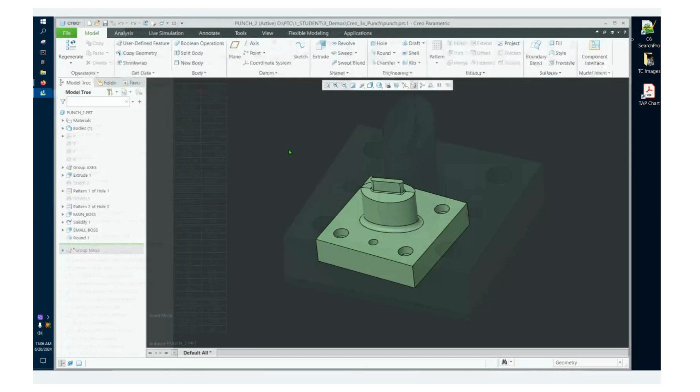Creo NC is obviously stood up on the backside of Creo Parametric, if you will. This is a standard Creo Parametric. It's just a punch widget that we have here today that we're going to take a look at. This punch widget exists on what we call... whoops, I've got an instance open.

My apologies, I'll have to open the generic here. So we'll open that up. This object exists on what we call a family table.

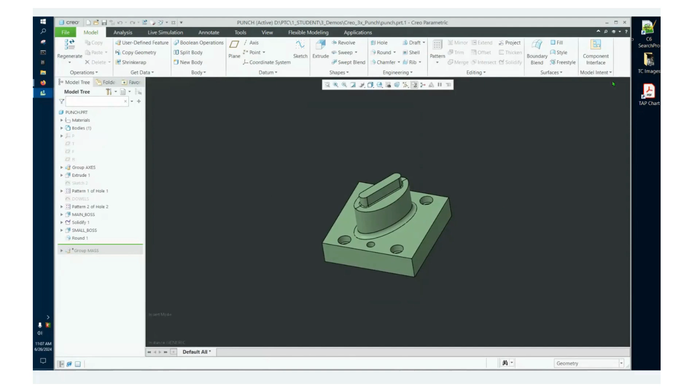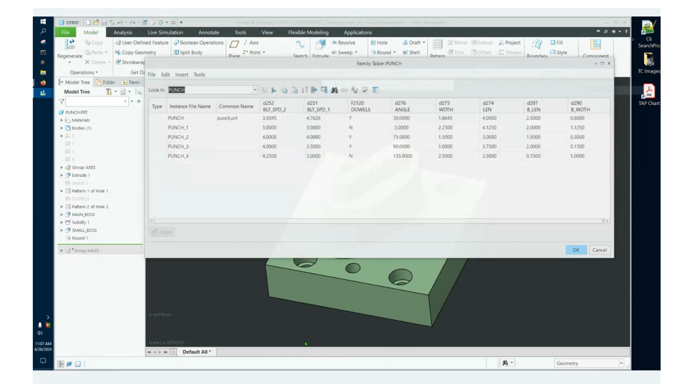As we see here, we have a tabular setup used on the design side to create 4 different iterations of this widget, with slightly different dimensional and geometry configurations based on the values of that table. The reason this is significant is because we can do the programming in Creo essentially one time.

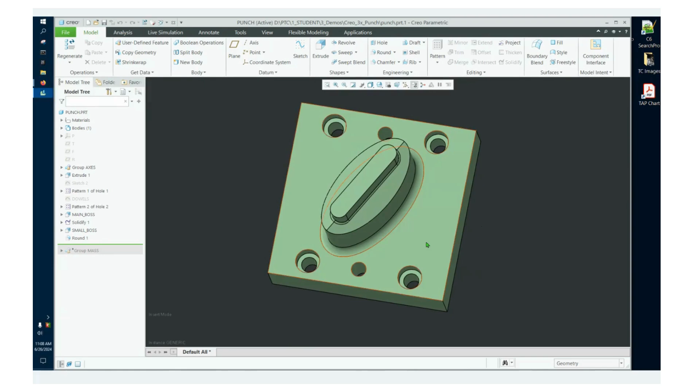That's just one of the many benefits that Creo NC enjoys, being connected as intimately as it is to the Creo Parametric product. We'll be jumping back and forth between this part a little bit because we're going to watch changes on this part deploy into the Creo NC environment. But this is our Creo Parametric object that we're going to work with today. It's just been created as a demo for this purpose.

It contains a handful of different Creo Parametric features that are manipulated by the tabular information in the family table. So we'll kind of keep this in the background a little bit. I'm going to close that particular instance of the object that I had opened, and we're going to go back to our Creo NC file here.

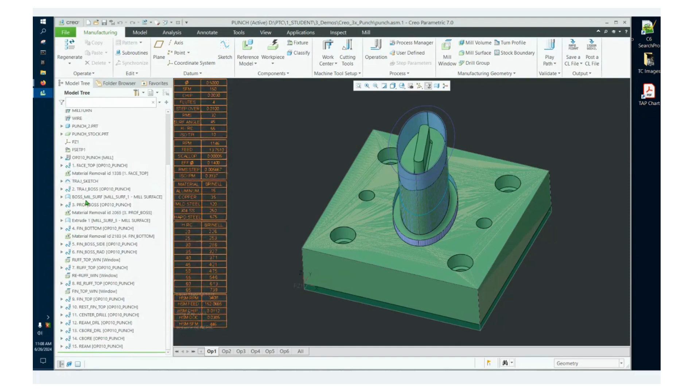As I mentioned, I'll show this real quickly as a first part of what we look at today, and then we'll get more intimate about Creo NC itself. We have 4 versions of that part on the table, and that allows us to switch these things out quickly and easily and keep all of this programming that you see here. So we have a bunch of these cuts already established on this object.

You can see here we have some mill surfaces shown on our part, and these were used to create different cuts and things to that effect on the part. Those surfaces can be hidden and shown, much like you would work with any other NC or design product.

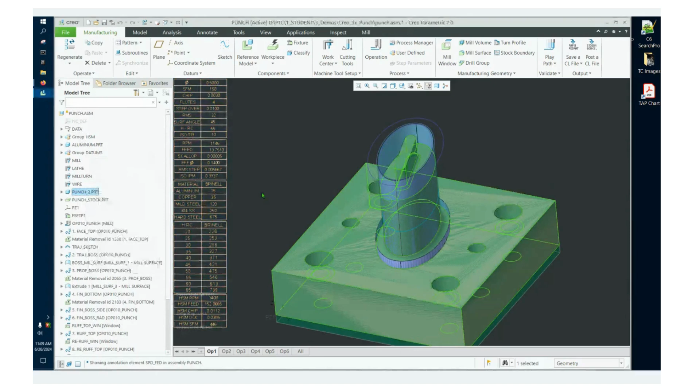In this case, what we're looking to show is that I've got this punch 2 version of this object up here right now. And if we come down and look at the center drill path, I'm going to turn that on and play this and set it up. We see here's where the center drill is drilling on these parts, drilling those hole locations that we see there.

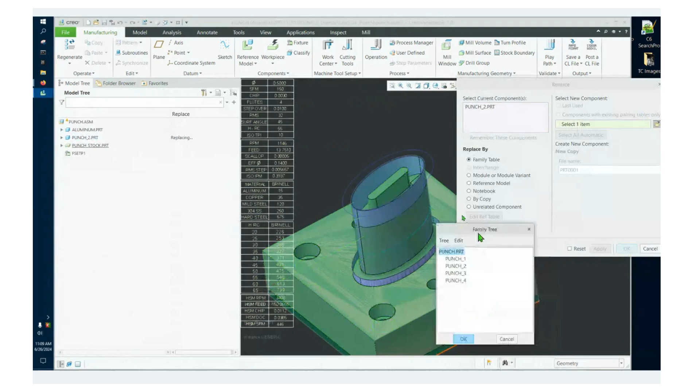If we were to swap this object out for one of those others on the table, I'm just going to select one of those other table objects. We'll select the generic in this case, which wouldn't typically be a workflow, but we'll do it anyway. Now we see we've swapped that back over to the other iteration of this part, and we've moved these holes and dimensions somewhat by doing that.

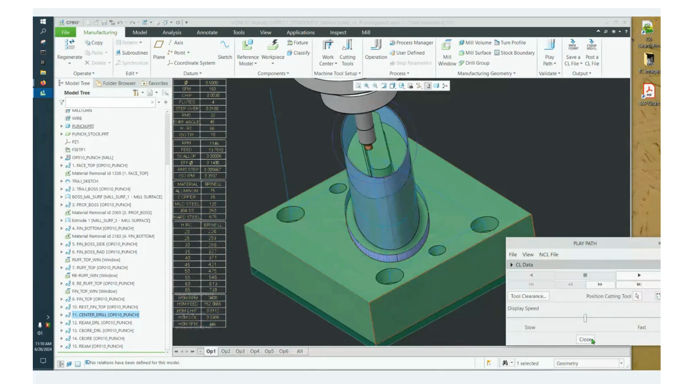But all of the machining is still connected to that. So when I come in here and play the center drill, it's still very much connected to those parts and to that geometry that we worked with there.

If we jump back to our punch part, which is what we now have in the NC side, I'm going to open up our punch 1 iteration here, and we see that doesn't have the dowel pins in it. So let's go find another one that does have the dowel pins, so it's a little easier to see what happens here. Okay, there we go, this one does have the dowel pins in it.

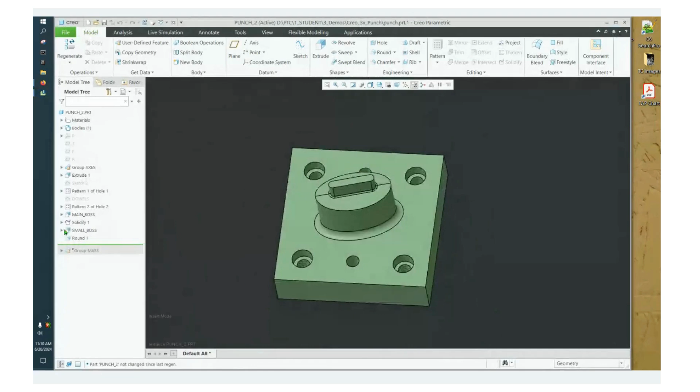So let's go ahead and manipulate the dowel pin position in this file. This might represent a typical scenario of an engineering change that somebody is making with Creo Parametric, and we're subsequently moving these dowel pin holes around, kind of reattaching them. That might represent an engineering change that somebody does inside of a Creo Parametric model.

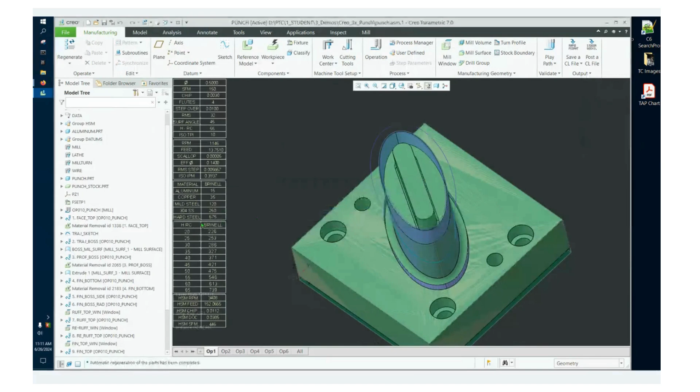Now, because we have this linked in, and we have this awesome associativity between Creo Parametric modeling and Creo NC, when I jump back into the Creo NC part, our punch assembly, and bring up that part, and we regenerate that, now we see that my center drill subsequently follows that new geometry automatically.

So this is the essence of one of the biggest benefits of doing everything in the same house, as I like to say.

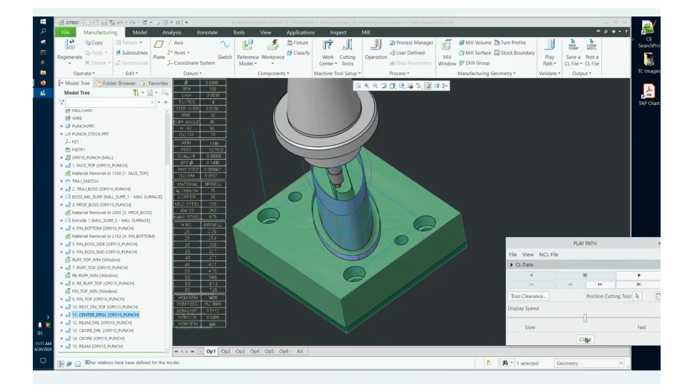We do the design in Creo, we do the NC in Creo, everything is linked in, everything is associative. We can subsequently make changes to the object in design, propagate those changes into NC, and not be reprogramming and starting over and going through extensive rounds of double checking to make sure that what we expected was in fact what happened.

So the power of being able to do that can't really be overstated. It's a very significant part of the benefits you get from working in a connected universe like that. So that's what this is all stood up on. That's probably the most important and most significant thing that people enjoy in their design and NC linked connections, when we're using a PTC product to address both of those issues, both design and manufacturing.

Now we understand that it's all connected and it's all associative, and I can work on families of parts. I can just come in here and right click on this and swap this out for another one of those, and I don't have to redo all the programming like we saw.

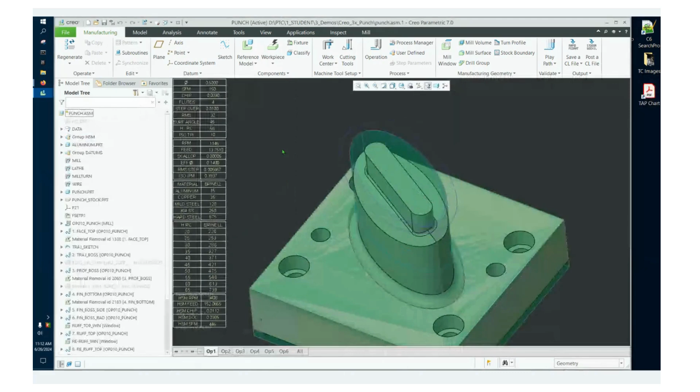Very, very powerful stuff. But let's have a look at some of the things that Creo NC in and of itself does. So here inside of Creo NC, it's a tree, and you build out your cuts like you kind of would in most any modern NC product. We'll talk about a few of the significant things that Creo NC does.

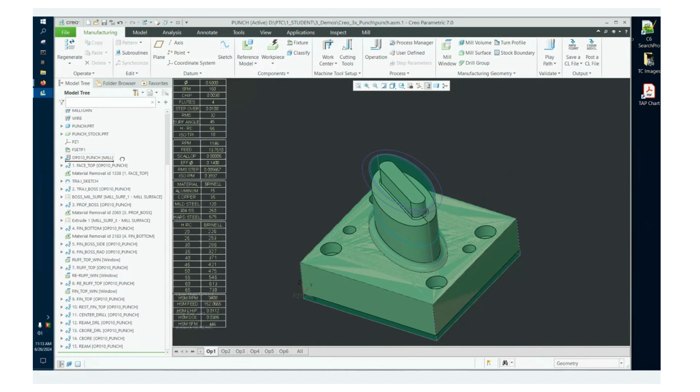So if I come in here, here we have our part, and I've just rolled back in time, which is one of the nice features that Creo NC and the design side provide, the ability to roll back in time and sequentially step through the iterations of what you've done and how you've built what you built. So here in this case, we've got a face mill, and I'll just activate that, play that, put that on the screen. And of course you can play these things through.

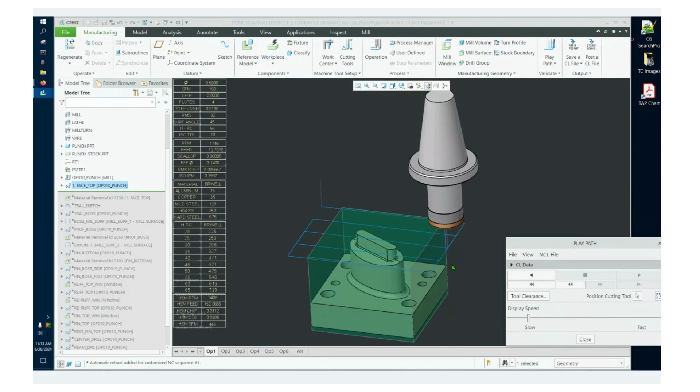And then we have a simulation product that's tied into this called ModuleWorks. That actually allows us to, in a real-time sense, watch the material being removed, in a more advanced playback, I should say.

And we also have here inside of Creo NC the ability to work with this green part that you see, which in this case represents what is referred to as my workpiece. Now, when we make cuts to the workpiece, one of the benefits here is that it will progressively be understood by Creo NC as we move along, as what we would generically refer to as a stock modeling context.

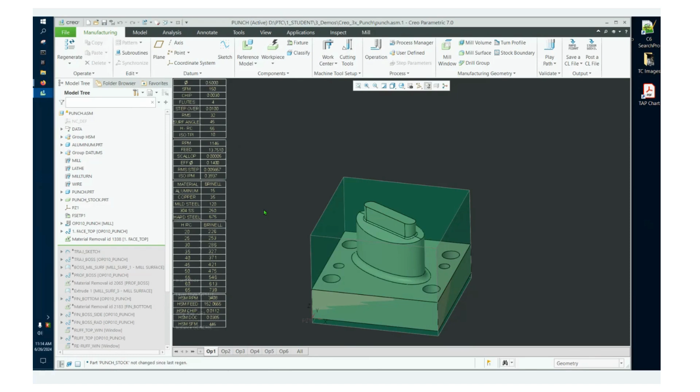So in this case, I did a material removal, and that material removal is taking off from my workpiece everything that this face mill cut off. So now my workpiece is the same height as the top of my part, because that's been trimmed off. So now we'll step down through these cuts here. So we have some different cuts we can look at.

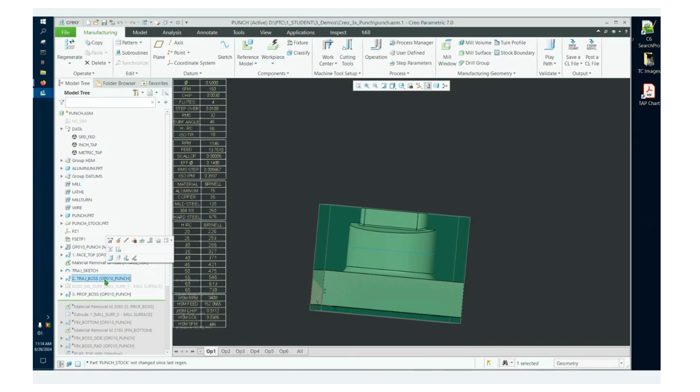So here's a sketch that I've made to create what we refer to as a trajectory, which is a big fancy word to refer to path. So we're saying, hey, this is the path, I'm going to have this oval shaped path that goes around the part here. And then this is the cut that is associated with that path.

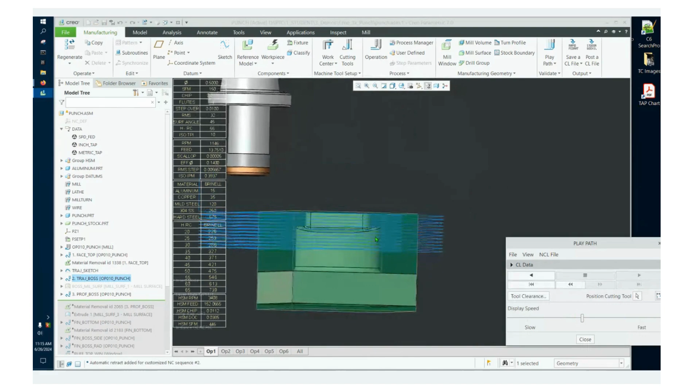And this is one of the ways we can do that. So we're going to come in and rough this material off in kind of a biting in, profiling sense, and rough down the punch to that level, using that as our path. That's one way we can do this.

We can simply sketch these curves, or select a curve on the edge of a model, for instance the curve I'm highlighting now, and we could use that as a path to drive a tool. We can sketch those paths, we can pick those paths off the model. We have a lot of flexibility for that. These types of trajectory path-based cuts are available in 2 through 5 axis.

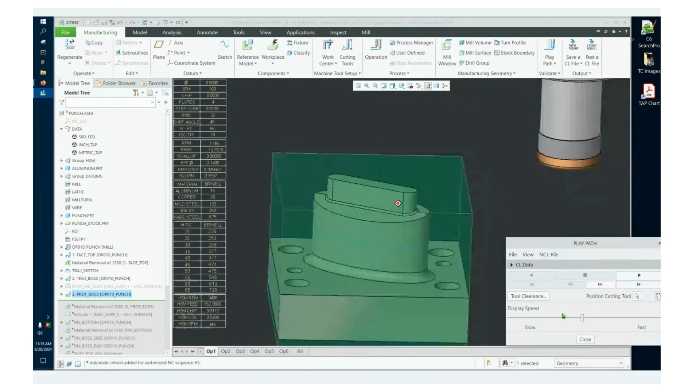Okay, so everybody in all things NC pretty much does some form of profiling too. So here we have the equivalent type of cut as a profiling operation, and we'll watch this go through now, and we kind of see the same type of stuff happening here, but it's based on a profiling operation instead of a trajectory-based operation, to take that same material off. Now, what's driving that profile cut is this surface.

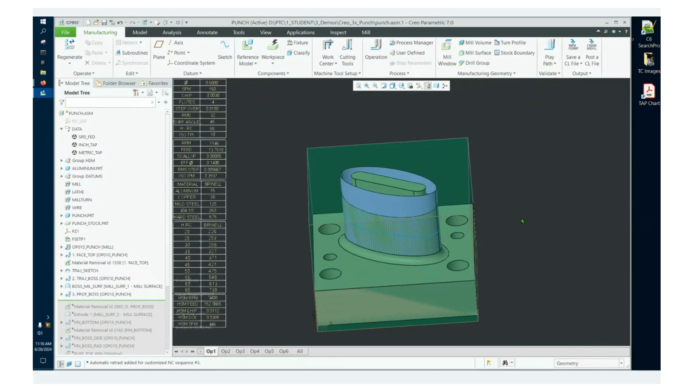And this is a unique, very powerful feature of Creo NC: the ability to simply create this surface, copying a piece of the design model underneath. You can see from the zebra striping that these things are in fact dimensionally coincident.

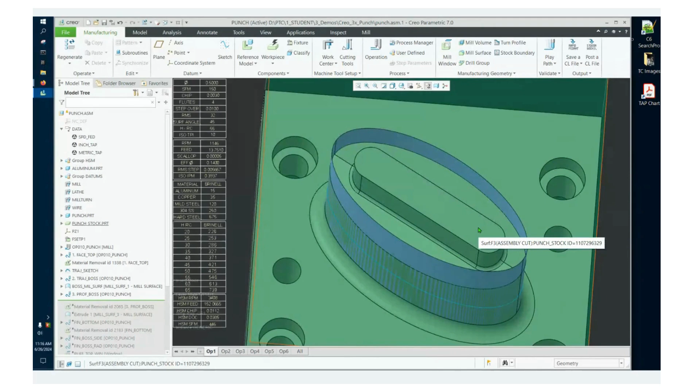And the ability to copy this surface and then subsequently pull this surface up to my workpiece, so that the cut doesn't think or understand anything having to do with this secondary boss that exists on my part. That's not what I'm trying to do right now. I just want to rough the primary shape from the bottom up.

I am in this stage of operation not really looking to get into the intimacy of cutting into these fancy details on the top, but I want that boss to be complete from the top down or the bottom up, however you want to look at that.

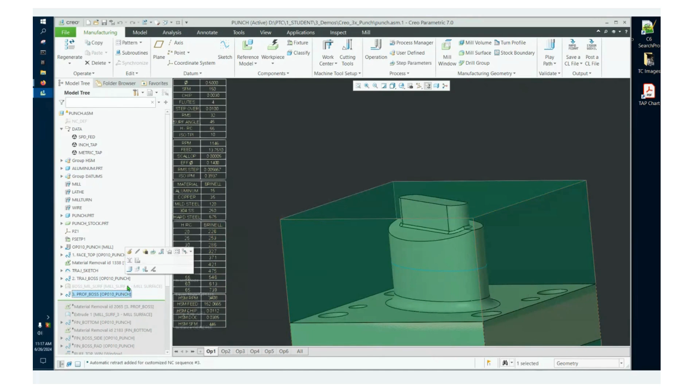In order to drive that when my geometry isn't that, because as we see looking at the geometry here, it doesn't have that shape. If I told it to just profile these surfaces of the punch that we see here, it would create a cut that starts up here and would be kind of a little disconnected, and then it would eventually catch up to the full circumference where it's continuous, and then it would proceed with the cut.

But the ability to create this surface quickly and easily and copy it and just pull it on up to our workpiece allows me to pull in this profile cut that we saw and drive it from that surface, so that I don't have to get into a cutter path that gets involved in the top of the part up here in a way that I'm not looking to in this stage of the cutting operation.

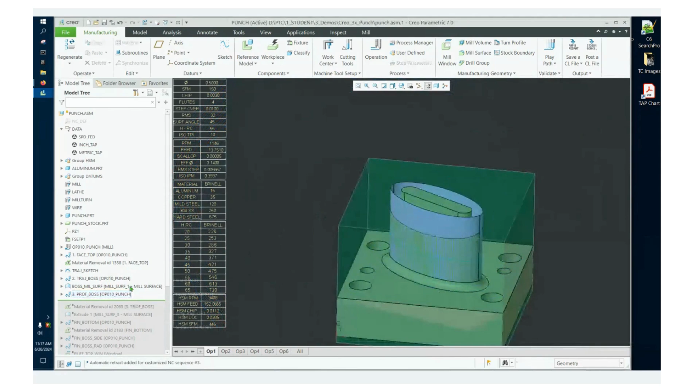So it's very powerful to have the features of being able to create on-the-fly geometry that's not linked into the actual model. So we have this surface here on the model and it is associative to the model, but if I were to actually go open this object, that surface isn't there. That surface doesn't negatively impact the design group.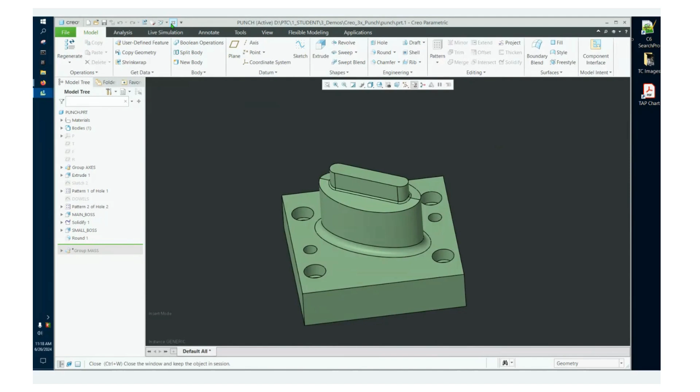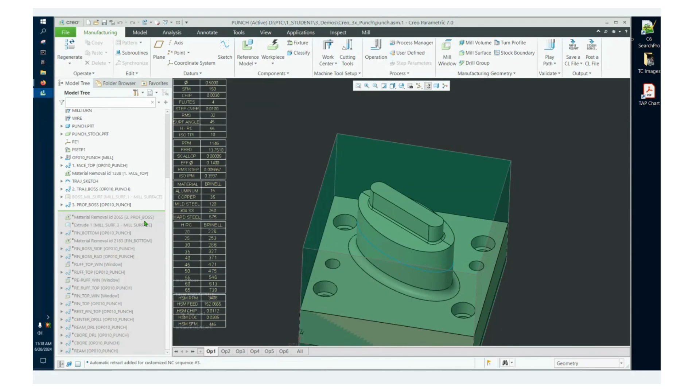It's not something they have to hide on a drawing or something they have to interact with in any way, shape, or form. The surface simply doesn't exist for the design group. It only exists here in my space inside of Creo NC. And this provides a lot of strength for me to manipulate an object by adding some surfacing to it to influence the cutting of that object in the desired way, shall we say.

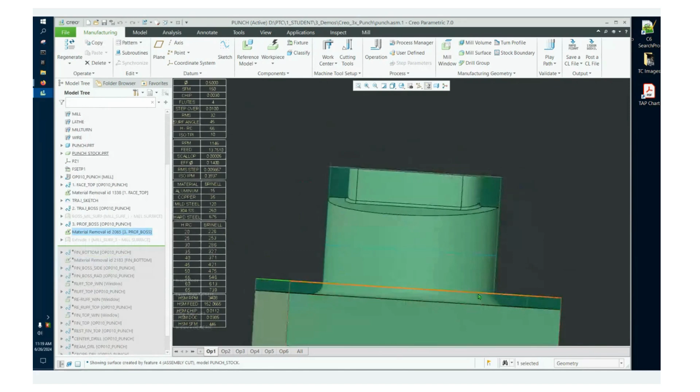So after that's been completed, we could go do a material removal cut again. And when I pull this material removal cut into the timeline, as I just did, we can see now that, yep, now it's clipped the model again. The face mill clipped it off on the top on this surface, and the material removal that we just did referenced this profile cut and subsequently clipped it off down to where the radius intersects tangent on the shape of our punch.

Now we have another surface that I'm going to hide. So we look down here and yeah, this is the kind of stuff that becomes a little bit problematic, right? So we have this big chunk of material here in our part that we still need to knock off. And we've got a tangent radius that's coming up off of the bottom of it.

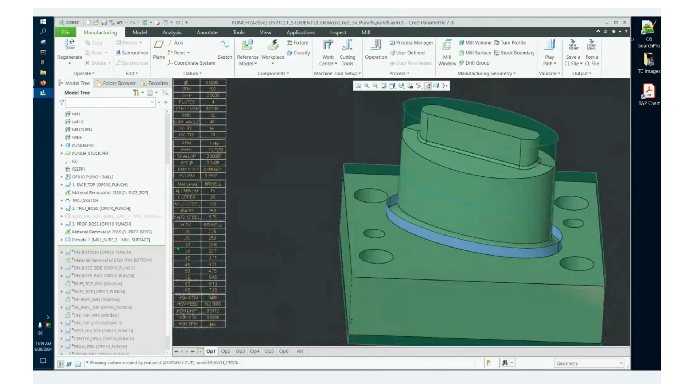So it's nice and powerful here inside of Creo NC to be able to create a surface just using that edge, that tangent edge of that radius where that exists, and then subsequently drive another cut up against that surface. So now we're using a great big face mill type of tool here, and we're going to go in and cut everything off, take one big pass, everything off right up to that surface.

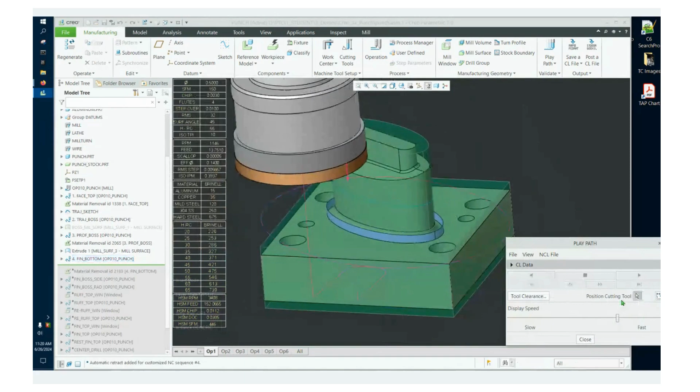And see, we can grab the tool here and position it on our cutter path and then kind of see the nature of it and how it's working up against our surface, and the context positionally of our tool in the NC space. So now we've kind of cut that off as well. We've done a path to cut around that. So, hey, let's go ahead and do another removal on that.

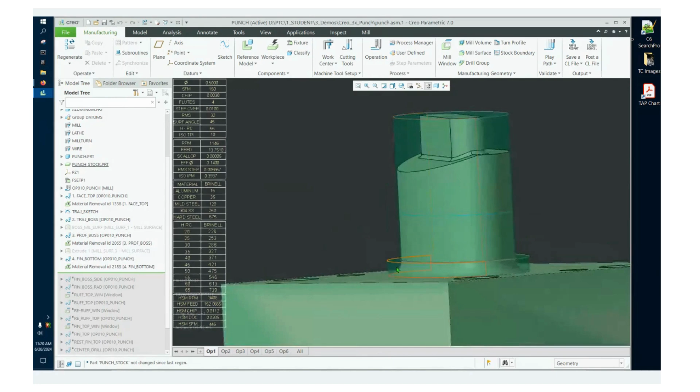And now we see that we have knocked our object down to a very clean, roughed state. We have this step of green material that we've got to deal with here that cuts out for a radius. We see that we've got a little bit of material left on the outside of our punch. We've taken it down to the top surface here, and we've really set this up in a way now that we're ready to rough off, clean, and finish the punch itself.

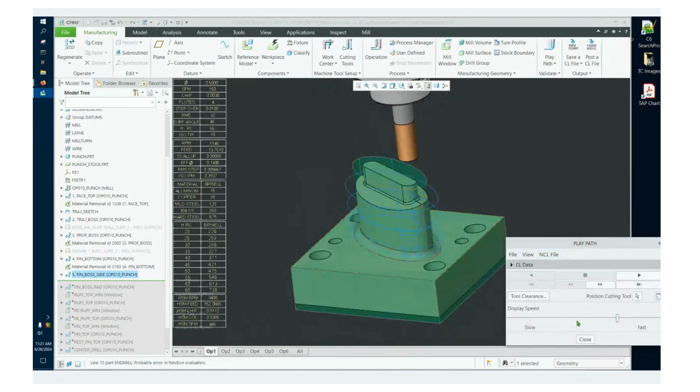Now, of course, Creo NC affords us the ability to do 3-axis tool paths and things to that effect. But before we get to that, we're probably going to come and finish the outside of the punch. And that's what we're looking at here, a cut that comes in and takes this to size, because we saw that we have a little extra material on there, we can see right there. And then we can finish the top, finish the boss radius here as we see.

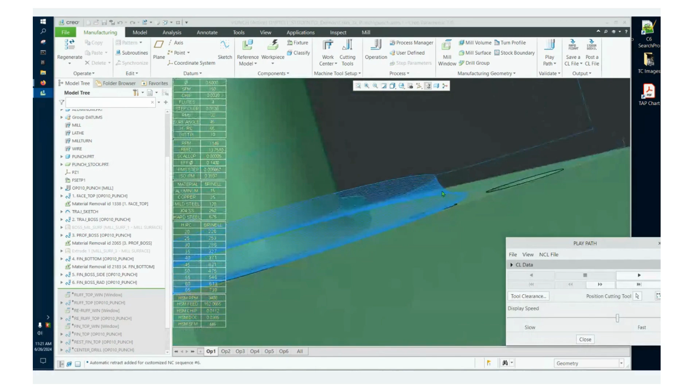So that cut's going to be a little bit more involved. Bear with me, it's got to regen that calculation. And here we see the cuts coming in and cleaning out and creating that radius with a much larger tool. In the interest of time that played pretty fast, so I'm going to do that again.

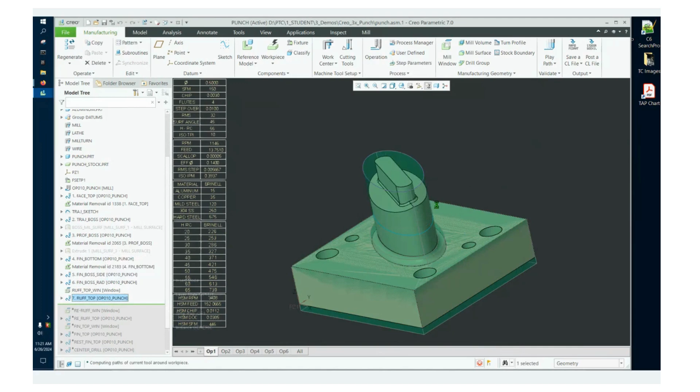So in the interest of being able to rough down to that face and keep a clean surface finish on the bottom and things, now we've got this big tool that we can come up in here with and just spin up that radius tangent in the bottom and get that part of it cleaned off as well. So then we might set up some cutting to rough off the top of the part. In this case, we're doing the roughing to take down the top of our object where we know this extra material exists around the explicit punch form here.

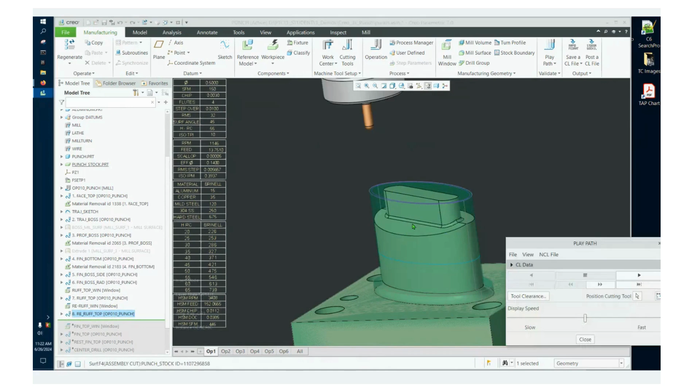And then we might work into a re-roughing operation where we're continuing to reference pre-existing cuts inside of Creo NC so that we optimize the tool path and gain the benefit of not recutting areas of the model unnecessarily. So this is an optimized path to come back in and knock down some high spots that would exist after the much larger roughing tool that we just watched, and get that cleaned up to size.

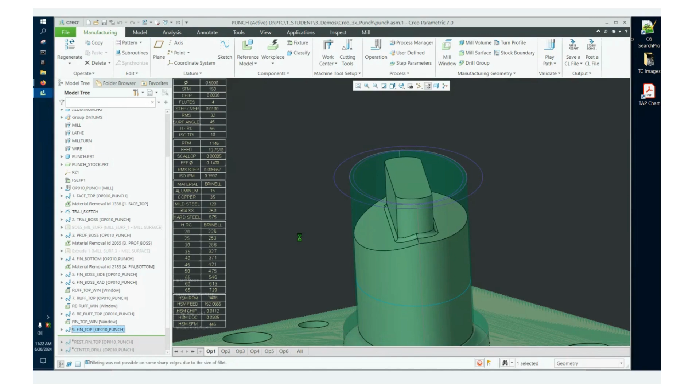And now we would see tool paths coming in here to start the finishing operation on our punch, and we're generating those up now. We see the first finishing op on the punch here. We're going to use a nice combination finishing on this that uses a waterline approach where appropriate, and at the same time can utilize a spiral finishing if necessary over the tops of these surfaces as you see here.

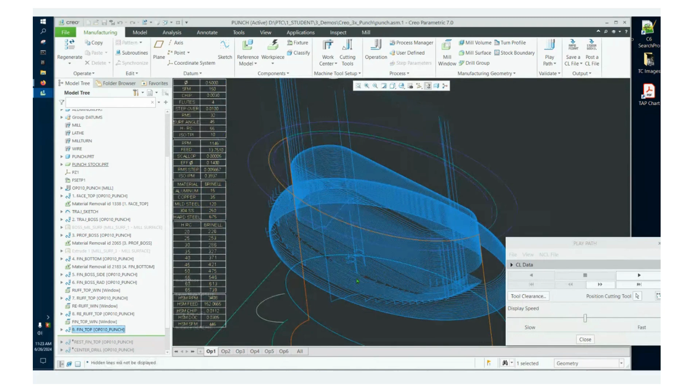So like you see here in this context, we're doing a spiral finishing in this pseudo very horizontal area. These flat areas have already been dialed in by the previous tools. We know the face mill did the top of the part up here already, so we see that stuff's not being addressed by this machining because it's known to be already done.

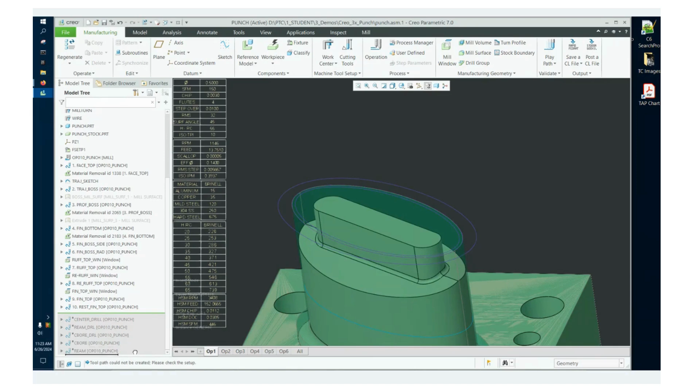All right, so we're going to do some rest finishing now on the top here. We're using multi-stage tools, so we're stepping down to smaller tools. This is a big part of dealing with machining in these kinds of environments where we have to use spherical tools. We could come in and do some rest finishing on the top. We obviously have the ability to do the drilling and things to that effect. We watched a little bit of that previously as a part of the associativity demonstration, if you will.

Whoops, I'm playing the wrong thing here. If I could turn off that calculation again. All right, so there we go. I wanted to play the center drill.

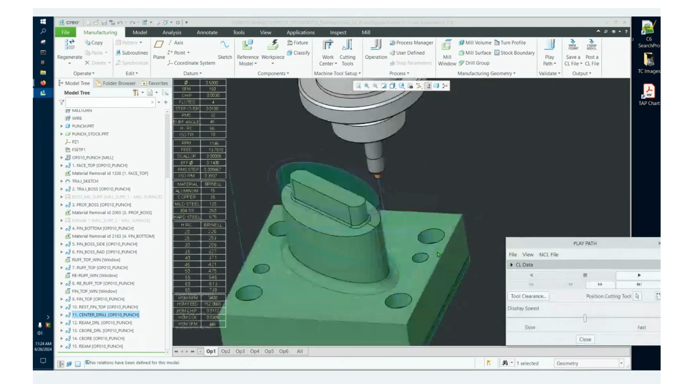So here we see, as I mentioned, the center drill. I made those changes to the dowel pin holes, and the center drill was automatically updated by that. The position of the center drilling and the subsequent follow-ups, we'll see this in the ream and such, were altered by that dimensional change automatically, and I don't have any reprogramming. I just simply have to enter this file and regenerate.

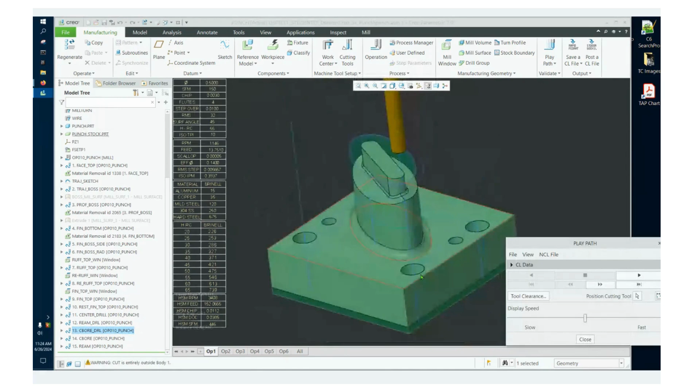So as we walk through this, now we see that the reaming is also linked in on those moved holes that we see here. And of course, these hole making techniques are very easy to use. We'll be taking a quick look at what puts a tool path together after we look at the cuts that are standing up behind this part. So here we see the big drill coming in for the counterbore, drilling the 4 big holes out. And then here we're going to go ahead and do the counterbore itself.

And here we see the counter bore tool coming in, and we're going to go counter bore those holes, and away we go. And then lastly, I've got a ream here, and I must have had 2 of those in there for no good reason at all. I don't have any idea why I put 2 reams in there for the same holes.

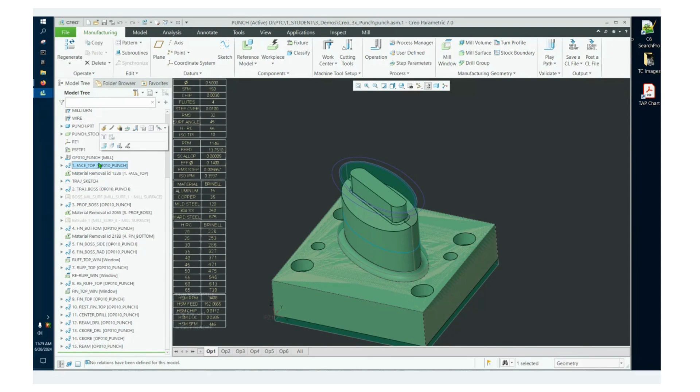But those are our cuts in this file, and that kind of knocks our file down and gets us into a place where, you know, hey, we've got this machined, we've got this associative to Creo Parametric, it's all linked in. If we make changes on the Creo Parametric side, we obviously enjoy the benefits of those changes here inside of our NC space. Now, what puts a tool path together inside of Creo is pretty straightforward stuff, and it arguably works very similarly to what we might see in other systems.

So we open this up, and we have an array of parameters, if you will, that drive the information of cutting. So we have feed rates established here, as well as different stock allowances and tolerances and step depths of cutting and things to that effect. It's very much the same as you would find in any product that is involved in NC. These are machining parameters that relate to the world of cutting, and this is where we go in Creo NC and we set them up.

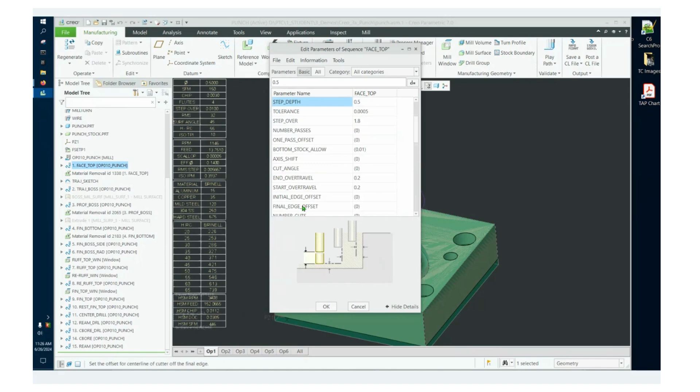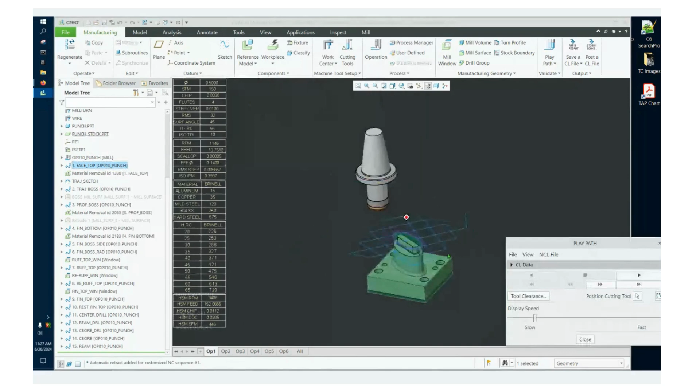And you see you have these tool tips, set the incremental depth of cut, things to that effect. And we can manipulate these things and see our changes in real time, so if we play this path back, there we see the cut path for our face mill. And if we were to subsequently activate that and change one of our parameters, we're going to change the angle of that face mill to 45 degrees because we can. And then we go play it back. Now we see that the face mill is tracking back and forth across the part at 45 degrees.

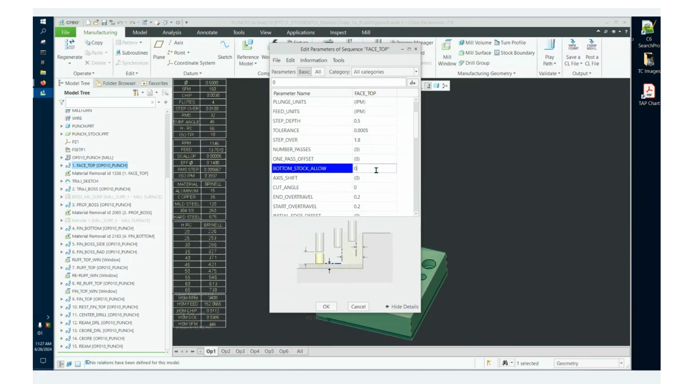So we can simply address these parameters quickly and easily that way to set up and change things as we see fit. We could change our step overs. We could change our stock allowances and things to that effect right here on the fly. So I could come in here and say, hey, in terms of stock allowance, I'd like this to cut to 0 in this case. We're not going to leave any stock allowance, let's say.

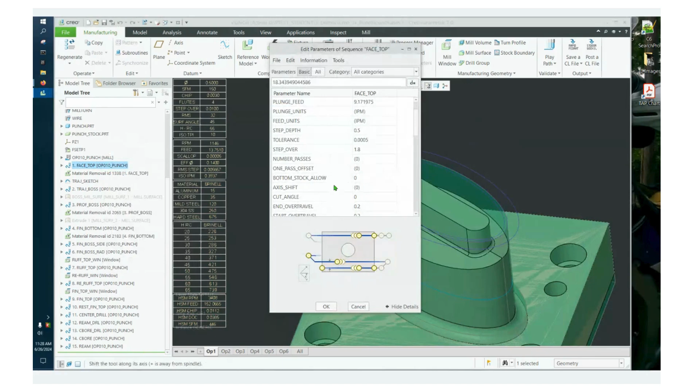So now when I come back and I play this path, now we have that cut. And if I zoom in here, you see that the cut is now coincident with the top of the part. There is no stock allowance. It's cutting to the top of the part because that's what we set our parameters to do inside of Creo NC. The benefit of this feature is the real time, what you see is what you get kind of connectivity. So just as you saw here, I change my stock allowance to some value, and I'll see that effect immediately as soon as I play that back in Creo NC.

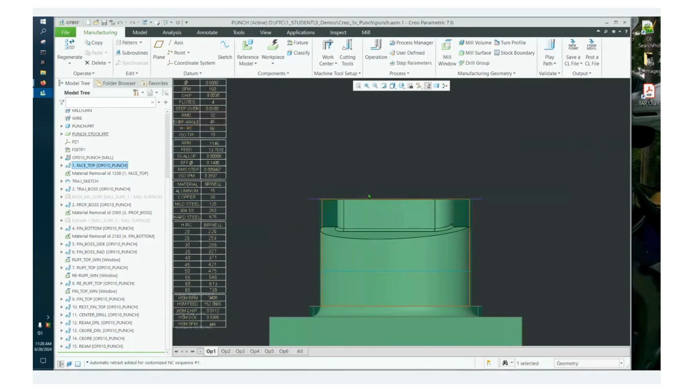So now I went back and put 50 thousandths of stock allowance on this, and now we see that that's where the cut is. The cut isn't even engaging the material because there isn't really that much material on this part. So we can easily and quickly address and edit these parameters in order to get our cutting to work in the way that we would prefer it to work.

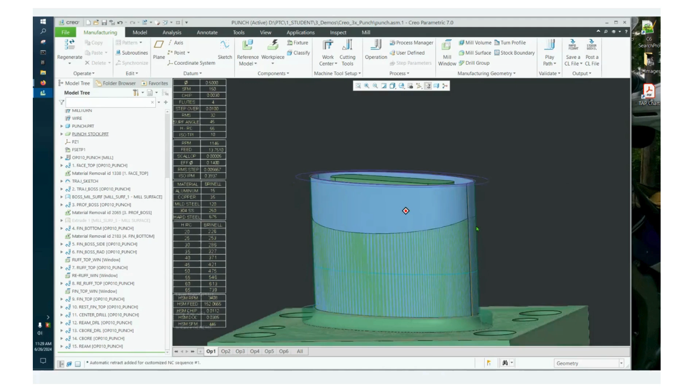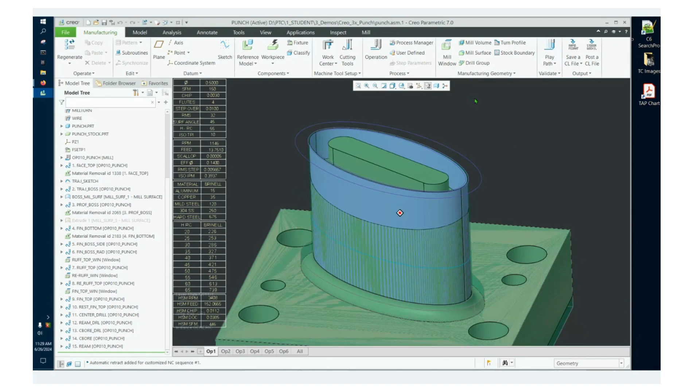We can absolutely come in and make changes to influence our cutting, utilizing things like these surfaces that are exclusive that we create inside of Creo NC. These exclusive mill surfaces, or manufacturing geometry as it is generically referred to, allow us to build on top of the design model without negatively influencing something in engineering or design or requiring them to do it. We have these full-on capabilities here inside of Creo NC. When I state that I want to make a mill surface, I have all of the power of Creo. I have a different ribbon.

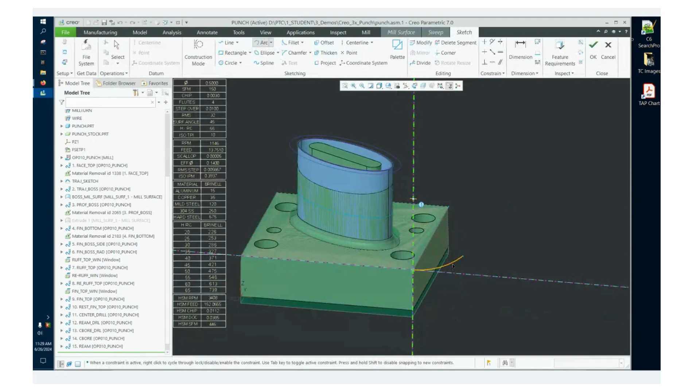I can see that the ribbon is different, but I have all of the same power of creation here inside of this creation of this mill surface here in Creo NC as I would enjoy on the design side. I could utilize advanced techniques like a sweep in order to create some type of mill geometry if I need it. We'll go ahead and just whip up a quick arc in here to kind of speak to that. So there we go. I'm just going to put a piece of geometry on there and sweep it, and there we go. So it's just that easy, and I have all of that capability.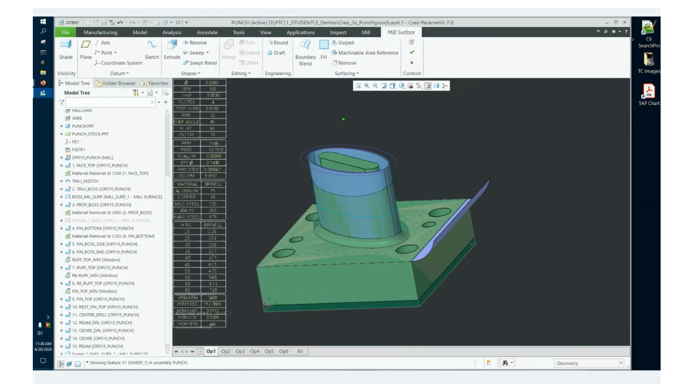I have the sweep feature and the blending and extrude and revolve and all of the engineering surface types, fill and surfacing and blend tangent to surfaces, vertex round, etc. The things I might need from the design side are in fact available to me here in Creo NC.

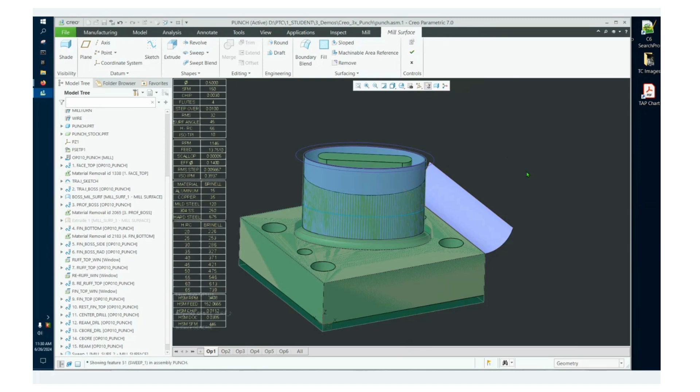Now I can use something like this surface I just created to tell the tool to cut that, or I can create these types of surfaces here inside of Creo NC and enjoy the benefit of telling Creo NC not to cut that. So it gives us an enormous amount of flexibility to influence a toolpath inside of Creo NC to be exactly the thing we want in terms of creation and in our cutting workflow.

So just understand that you are sitting inside of Creo NC. You are sitting on top of all of the features, benefits, and strengths of the Creo design product. And that's a lot of what makes Creo NC as strong as it does.

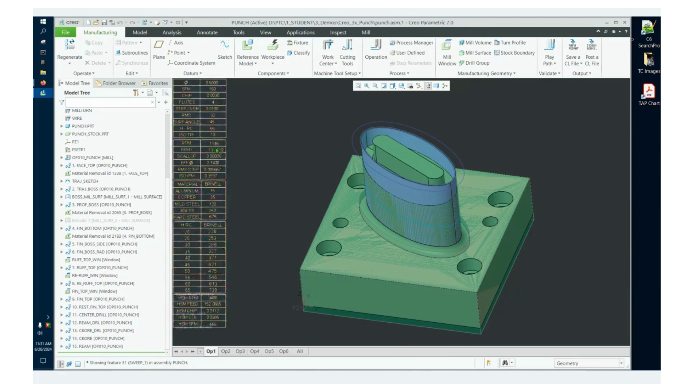Some of my own personal NC environment here takes advantage of things like what you see here, which is a symbol, a drawing symbol that is dynamic, and I can subsequently update data and work with that kind of live in real time. I could subsequently edit the values and parameters of these things. I could come in here to this parameters page that's associated with this symbol, and I could say, hey, I need to recalculate some values.

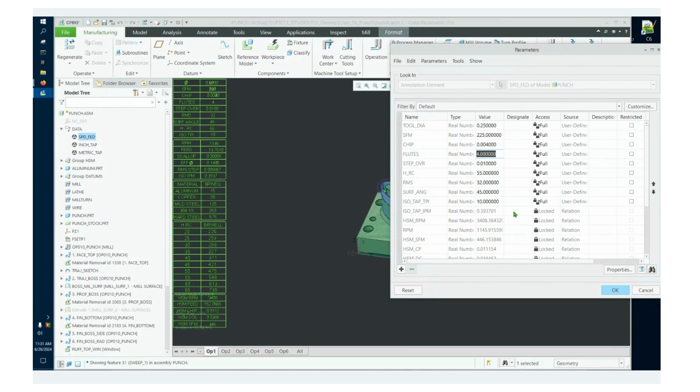So I need to know what a 250 tool at 225 surface footage running 4 thousandths of chip load looks like on a 4-fluted tool. So we go ahead and we say that, and I regen that. And now all of these values inside this symbol just updated to give me new information about what that would be with that 250 tool.

That's gonna create a scenario where, if I was targeting that kind of surface footage on that tool, my RPM would be approximately 3,438. I'd be pushing that at about 55 inches a minute. If I was stepping over that tool 10 thousandths, I'd be leaving a scallop height of a 10th English. The effective diameter on that tool would be 0.98. The RMS value that would be calculated by those steps in that reality would be 4 thousandths.

So, you can stand yourself up to take advantage of enormous power by being this intimately connected to the design side, not the least of which is to be able to use things like what I just showed here with these symbols and these features that are actually part of Creo detailing. But we just go create one of those in NC, and then we stand it up to do the things we want in NC. And it's not living on a drawing, but it's benefiting me immensely here inside of NC.

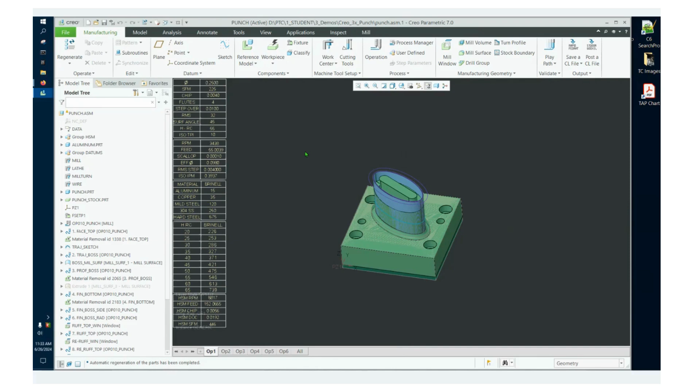And that's part of the enormous strength of Creo NC, again, to be able to work that hand in hand with these features and these functions from the design side of the product. Creo NC obviously gets its own unique ribbon to work in, and on the mill tab in this case is where we would find the different types of cutting that are available to us here inside of Creo NC. So these are some different types of cutting and things we have.

We have 3D roughing, 3D re-roughing, finishing, rest finishing, profiling, some additional volume space roughing, face milling, engraving, cut line. I mean, there's a host of different, the trajectory milling that's path-based that I had mentioned previously. A host of different milling techniques are available to us, not to mention many of them here on the milling overflow, corner finishing, surface milling, excuse me, pocketing, pencil tracing, etc.

We have a host of new advanced high-speed machining cycles available to us. High-speed machining rest finishing, high-speed machining roughing, high-speed machining rest roughing, and high-speed machining finishing as well. Those are tailored more to the organic surface machining disciplines, mold and die, things to that effect, if you will, and more sculpted organic cutting. We have a host of different hole making cycles that are available there. Everybody has all of the same drilling functionality in an NC package in the year 2024.

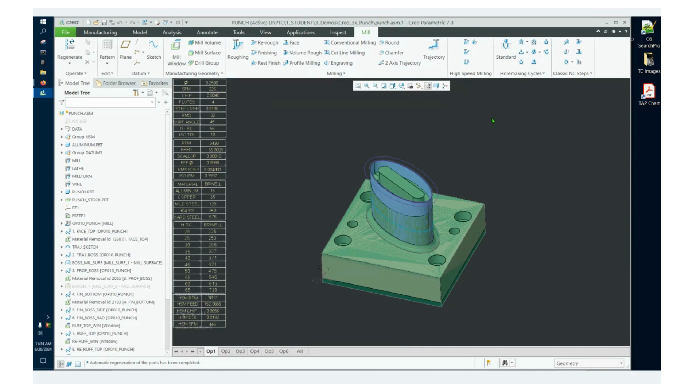But at the end of the day, the benefit of using a mill surface is to be able to influence the toolpath in a very specific way that you desire for that cut. It's not obligatory. And if you're not looking for that, I generally don't encourage users to use mill surfaces, because you do have to make the workflow, as you saw for myself, in order to go create that. And it is very quick and easy because we have the benefit of using all of the design power of Creo, but we ultimately still have to spend that time. So I advocate using a mill surface when there's a specific need, as I demonstrated. I wanted to influence that cut on the punch, but beyond that, a mill surface is 100% optional. And that is a very good question, and thank you for it.